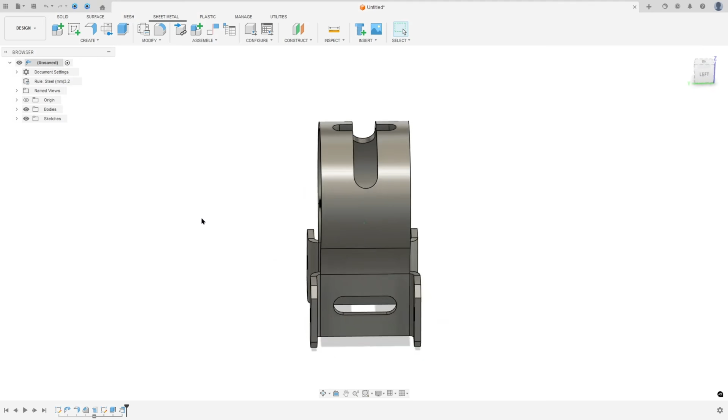Let's make one more tutorial in Autodesk Fusion. In this video, you'll learn how to use sheet metal, flange, chamfer, unfold and refold, and extrude. So open Fusion and let's go.

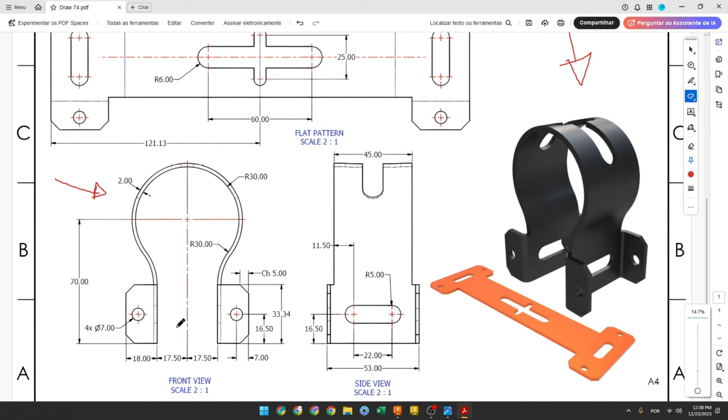The first step to create this part, we select the front plane and make this sketch, with the center point here. First we create a construction line with 70 millimeters of length, then we create this profile. We have all the dimensions here: the radius here is 30 millimeters, the radius here is 30 millimeters, the length of this line is 33.34 millimeters, and the distance between this line and the center point is 17.5.

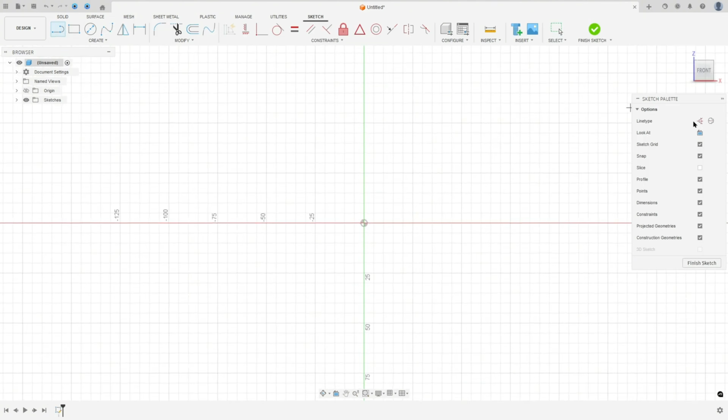So let's create this in Fusion. Go to create a sketch and select the front plane. Select line, a construction line, click in the midpoint, and make a construction line here with 70 millimeters of length. Select line again, but now remove the construction line type and we'll make this sketch. We'll put the dimensions later, no problem.

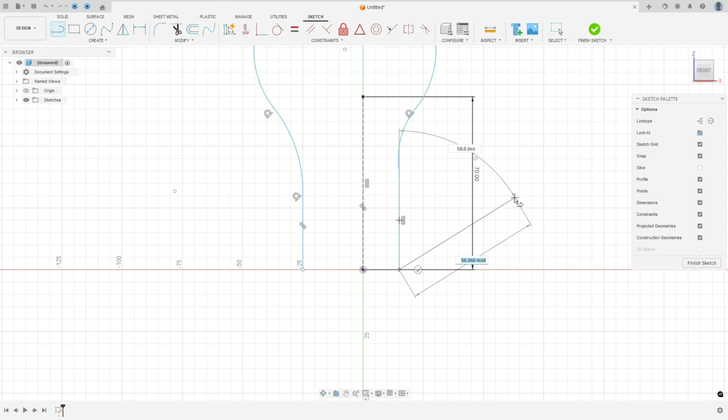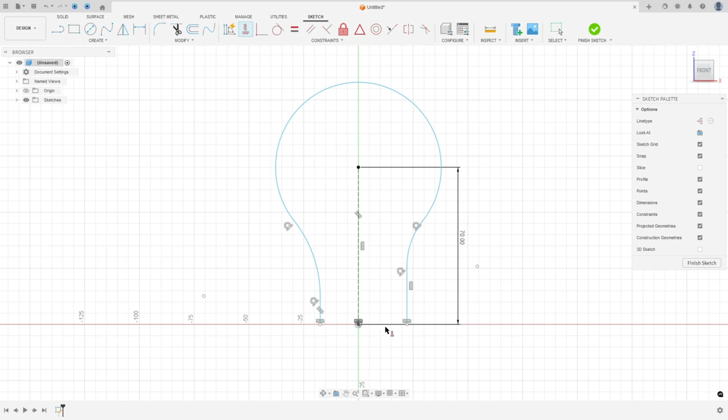Make sure the arc is tangent with the lines and tangent with the arc. Go to constraint, select coincident, select this point and this point. Go to constraint, select horizontal vertical, select this point and this point here, but not to this direction, it must be horizontal. The same for this one. Go to horizontal vertical again, select this point and this point here, and this point and this point here.

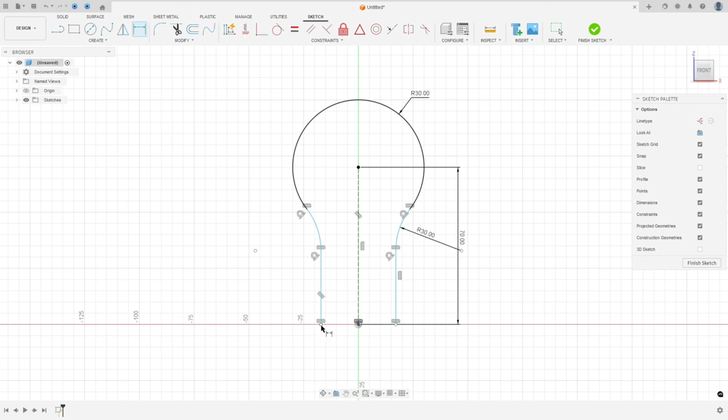Go to sketch dimension. The radius here, 30 millimeters. The radius here, 30 millimeters. And the distance between these two points, 17.5. The same here, let's check this dimension, and let's check the dimension here. Finish the sketch. We made this.

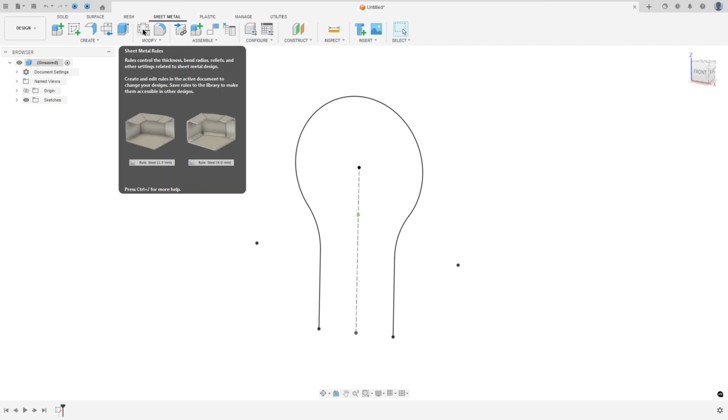Now we will use sheet metal to make this body. The thickness is 2 millimeters and the bend radius will be 2 millimeters. So go to sheet metal and select sheet metal rules, click create a new rule. The name will be steel 2 millimeters, thickness 2 millimeters, click bend conditions, and the bend radius will be 2 millimeters, then press save.

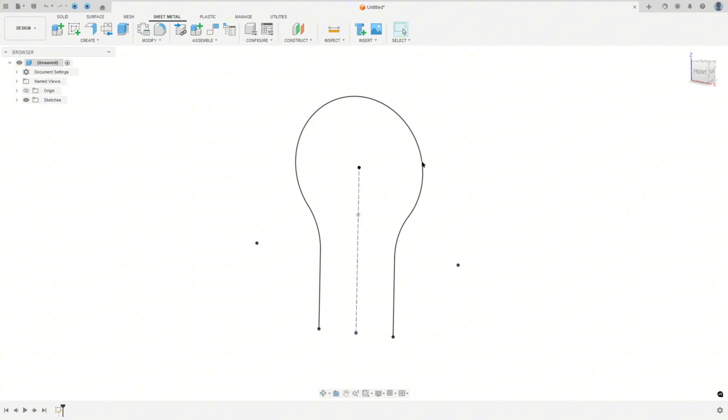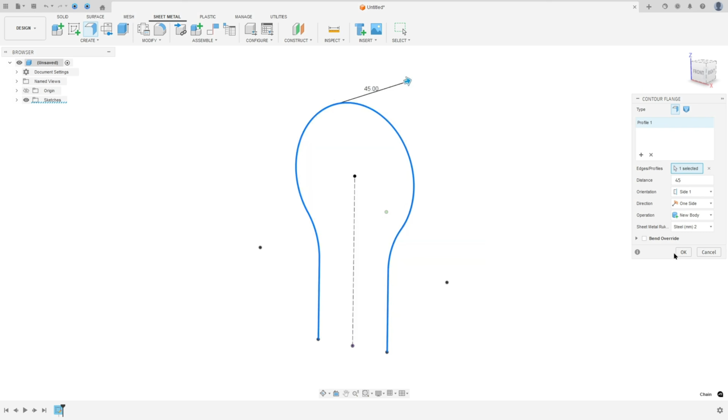Close here and go to sheet metal and select the flange, select this profile. The distance here will be 45 millimeters, and for sheet metal rules select steel 2 millimeters, then press OK. We made this.

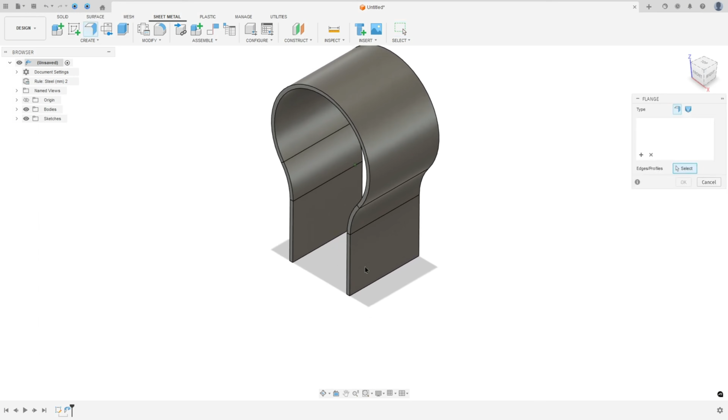Now let's create this bend here on both sides. This band has 18 millimeters of distance, and here we have a chamfer with 5 millimeters of chamfer. This band is in the 4 edges here. So go to Flange, select this edge, this edge, this one and this one. The distance 18 millimeters, and the bend condition here, position, is adjacent, and here inner face. Press OK. We made this.

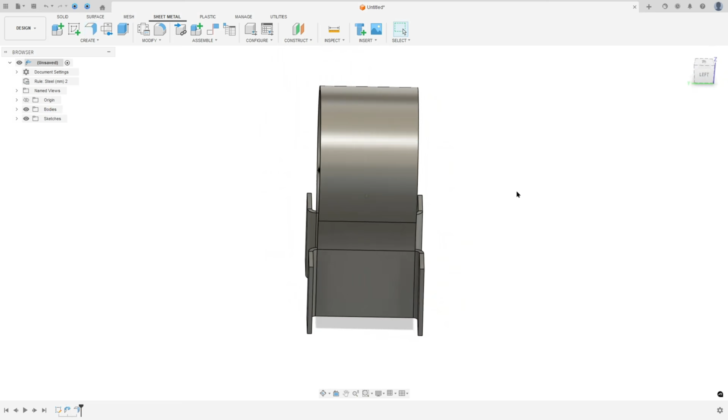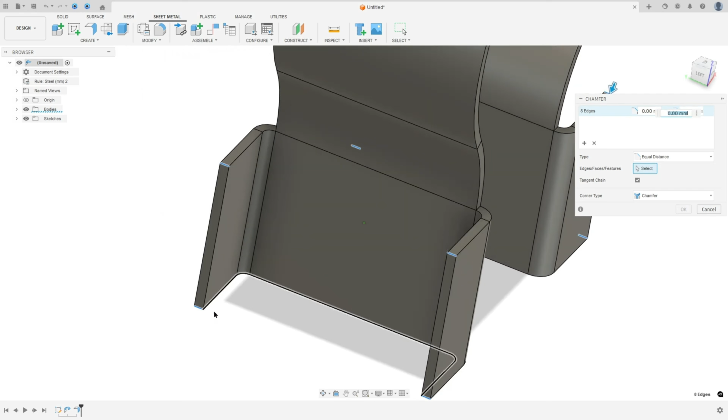Now let's create the chamfer. Go to modify, select the chamfer. The type equal distance, and this chamfer has 5 millimeters of distance. Press OK. We made this.

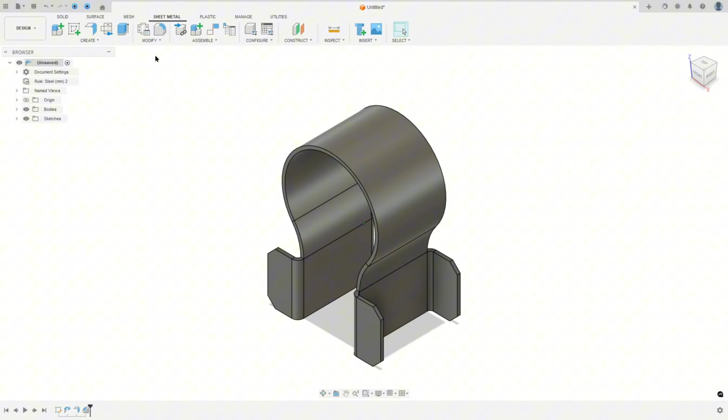Now we will create this cut here. We have to create these two slots to create a cut, the circles, and this slot here. So let's create this. First, go to modify and select unfold, and the stationary face will be this one, select unfold all bends and press OK. We have this.

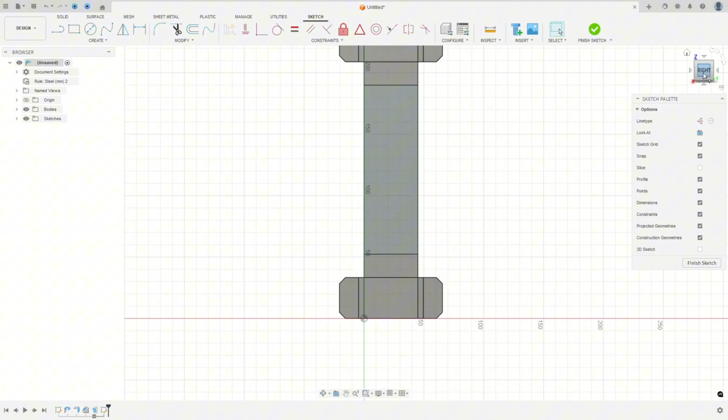Now go to create a sketch and select this face. I will rotate this a little bit. Go to create and select project, include project. The selection filter, select the body, select this body here and press OK.

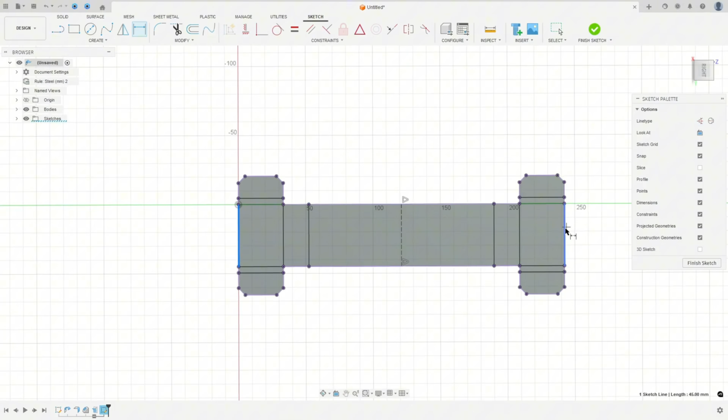Select line, a construction line, make a construction line here. Just to check the dimensions, the distance here is 242.25. Let's check this dimension, go to sketch dimension, the distance between these two lines. That's correct. So now we'll create the slot.

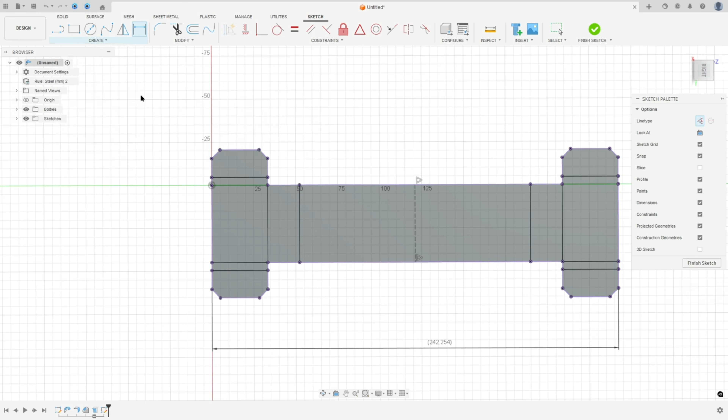Here we have a slot with 6 millimeters of radius, and the distance between the centers is 60 millimeters. Go to create, select a slot, center to center slot, remove the construction line type, and make a slot here, 60 millimeters. Go to sketch dimension, the distance here is 60 millimeters, and the radius is 6 millimeters. Go to constraint, select midpoint, select this line here, and this line here. We made this.

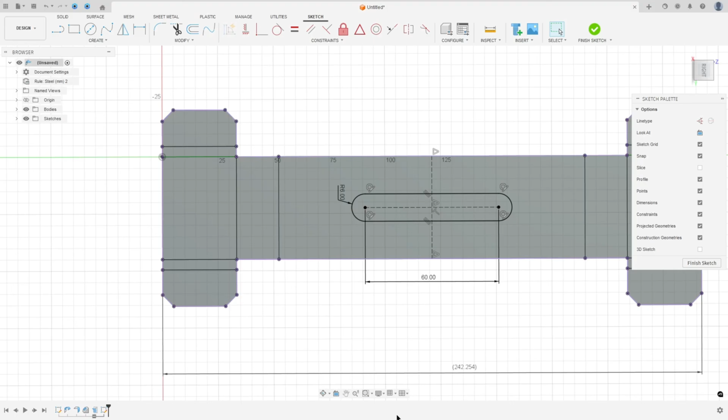Now we need to create this slot. The distance between the centers is 25 millimeters and the radius is 3.5. So make another slot here, 25 millimeters distance between the centers. Go to sketch dimension, the radius here is 3.5 millimeters. Go to constraint, midpoint, select the line of the slot and this line here. We made this.

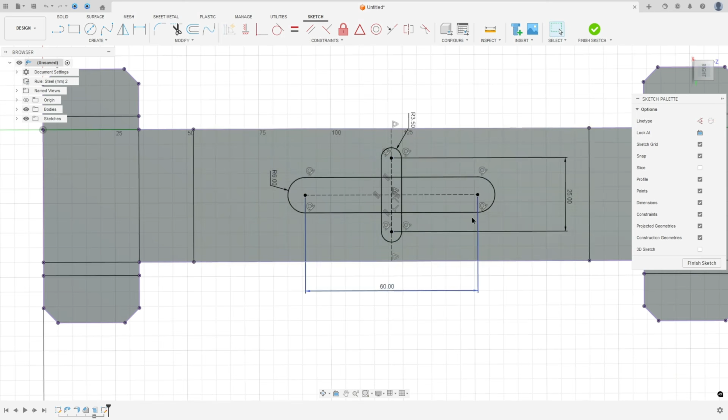Now we need to create this hole. The diameter is 7 millimeters, the distance here is 16.5, and the distance between the center and this edge is 7 millimeters. So let's create this.

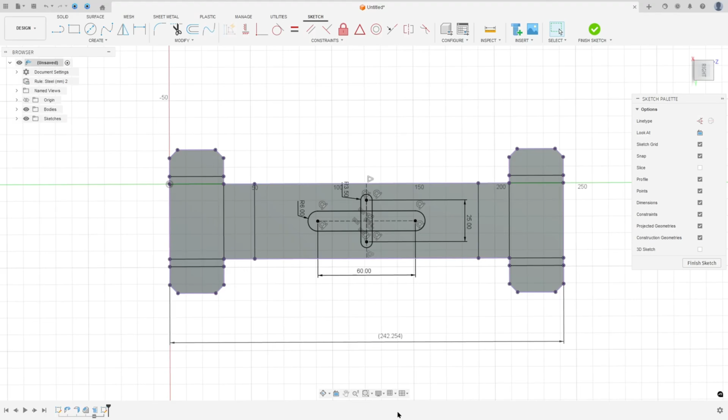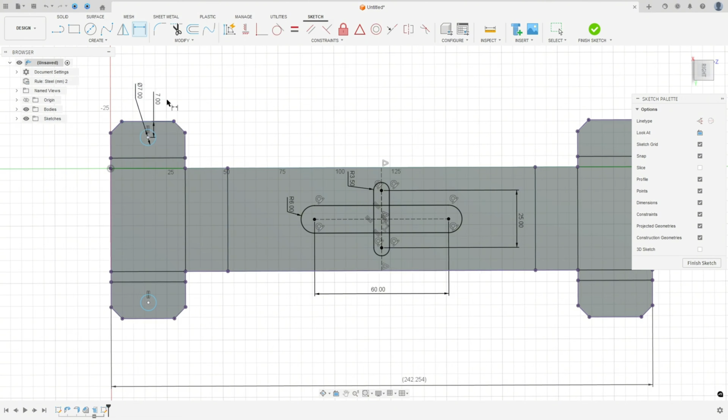Select a circle, make a circle here and another circle here. Go to constraint, select equal. The diameter here is 7 millimeters. Go to sketch dimension, the distance here is 7 millimeters, and the distance from this point to the base here is 16.5. Go to constraints, horizontal vertical, select this point and this point here. Go to sketch dimension, the distance here is 7 millimeters.

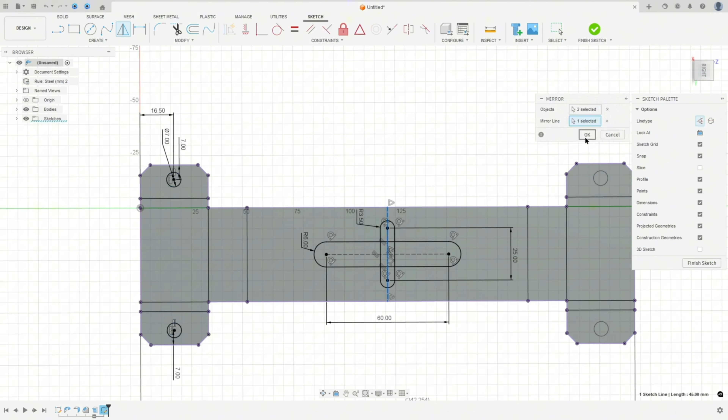Go to mirror, select these two circles, and for the mirror line select this construction line, then press OK. We made the circles. Now we need to create one more slot.

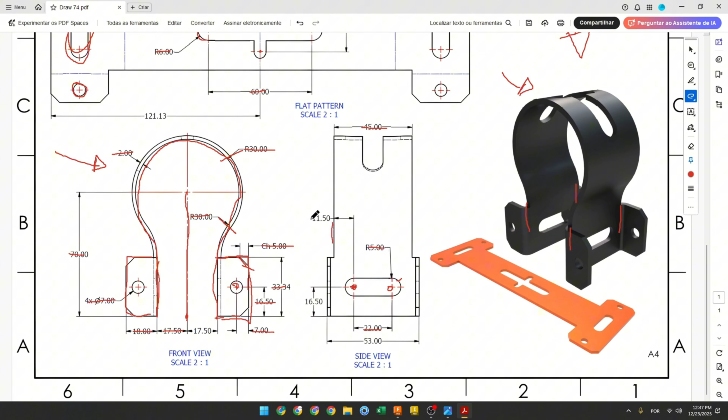Create this one. This slot, the distance between the centers is 22 millimeters, the radius is 5 millimeters, and the distance between this point and this edge is 11.5. So let's create this.

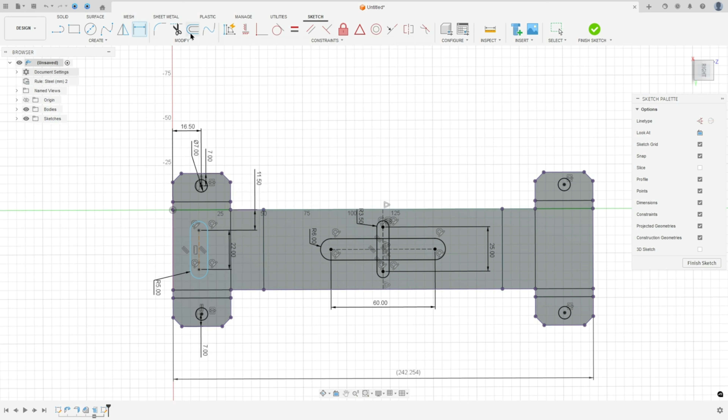Go to create a slot, center to center slot, make a slot here, 22 millimeters. Go to sketch dimension, the radius here is 5 millimeters, the distance here is 11.5. Go to constraint, select horizontal vertical, select this point and this point here. We made this. Go to mirror, select this slot, and for the mirror line select this construction line, press OK. We made this.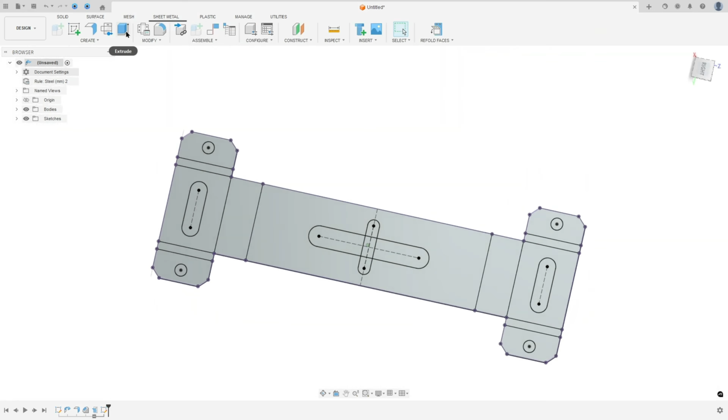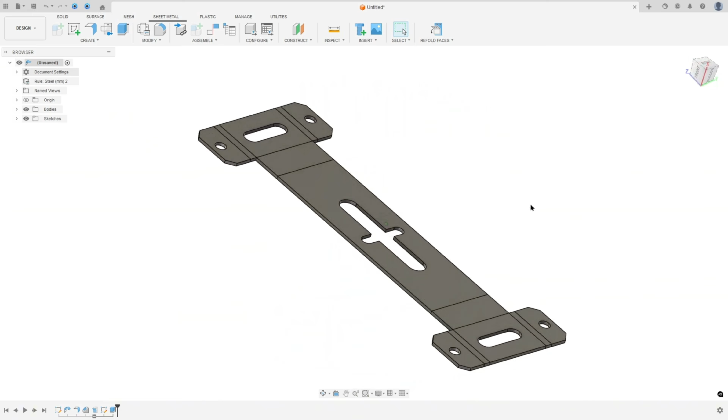Finish the sketch and go to Extrude, select the circles and the slots. Direction one side, the extent type select all, flip the direction here, operation cut, and press OK. We made this cut here. Now go to modify, sheet metal, and select refold faces. We made this, and here we finish our exercise.